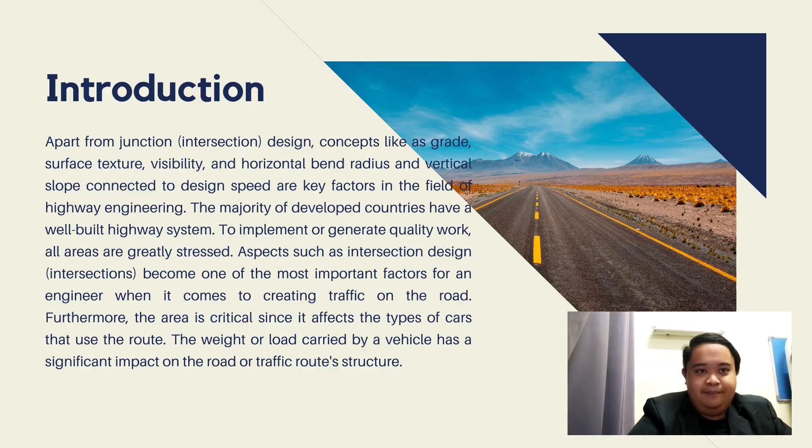Not to mention, non-destructive testing procedures are used in this pavement condition assessment, which is PCA, as detailed in the methodology chapter. The study area of this project is Taman Pelangi Road to Jalan Panchor, which is a distance of 1 km. The objective of this project is divided into 3 objectives. The first one is to be able to survey a 1 km road for the pavement condition index, which is PCI, at Taman Pelangi Road to Jalan Panchor Road. The second one, determine what kind of repair or rehabilitation is needed to improve the road pavement condition index. The last one is to learn about pavement discomfort and develop a better grasp of it.

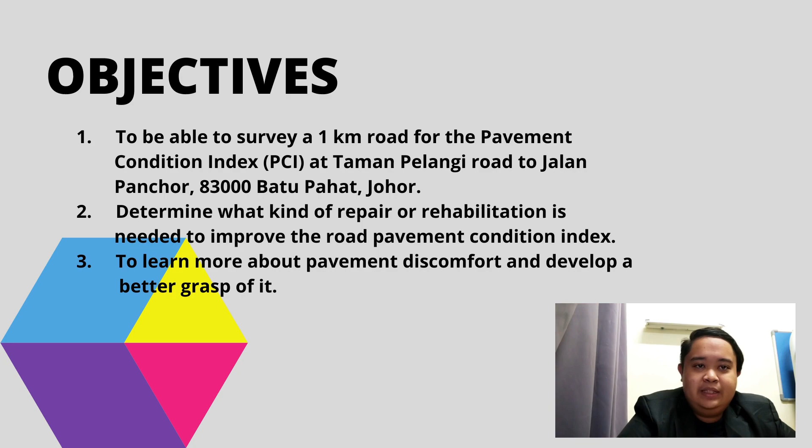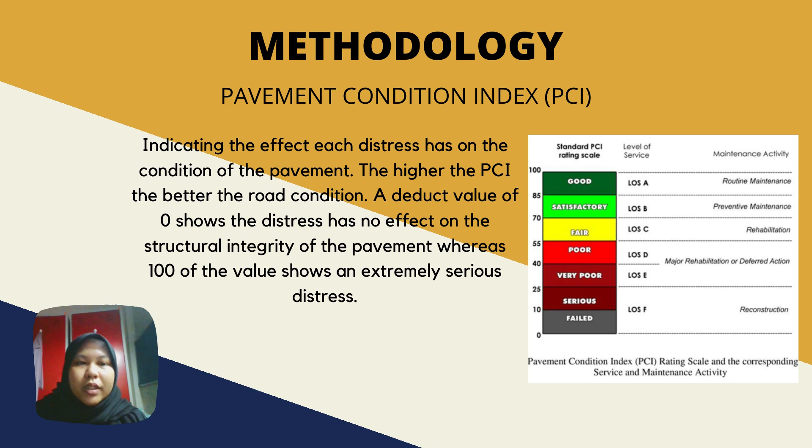AF200065. So for methodology, pavement condition index, PCI, is indicating the effect each distress has on the condition of the pavement. The higher the PCI, the better the road condition. The deduct value of 0 shows the distress has no effect on the structural integrity of the pavement, whereas a value of 100 shows an extremely serious distress.

Before we determine the value of PCI, we have to determine the deduct value first. First, sum up the quantity of each distress type at each severity level and record the data in the condition survey data sheet. Second, the total quantity of each distress type is then divided by the sample area and multiplied by 100 to obtain the percentage of density of each distress type and severity. The last one is determine the deduct value for each distress type and severity level combination based on the distress deduct value curves in the appendix.

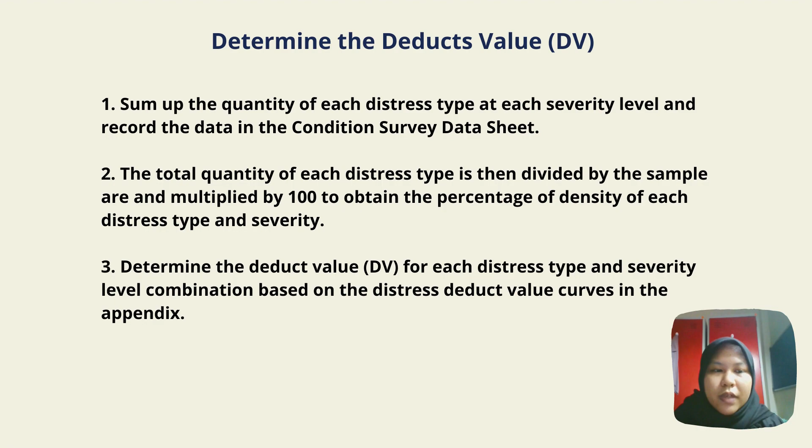Next, determine the maximum allowable number of deducts, which is M. First, if only one individual deduct value is over 2 for paved roads or over 5 for airfields or unpaved roads, the total deduct value is used instead of the corrected deduct value. Otherwise, list the individual deduct values in descending order and determine the maximum allowable number of deducts using the procedure described in the following steps. Next, the allowable number of deducts is obtained by using the formula M = 1 + (9/95)(100 - HDV) for airfield and unsurfaced roads. For surfaced roads, M = 1 + (9/98)(100 - HDV). Lastly, the number of individual deduct values is reduced to the M largest deduct values, including the fractional part.

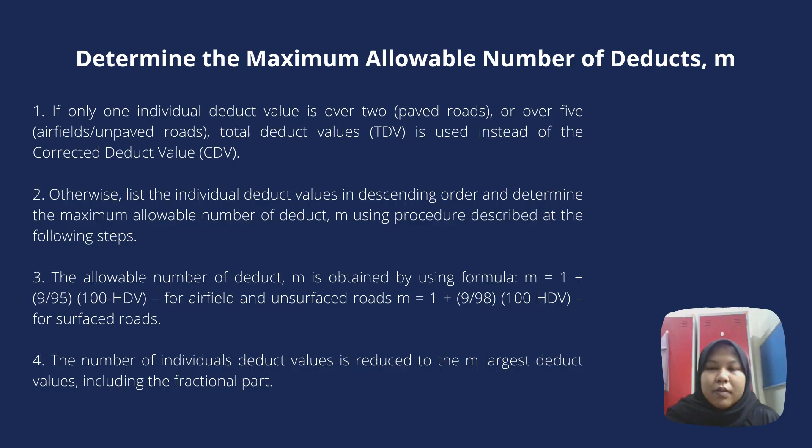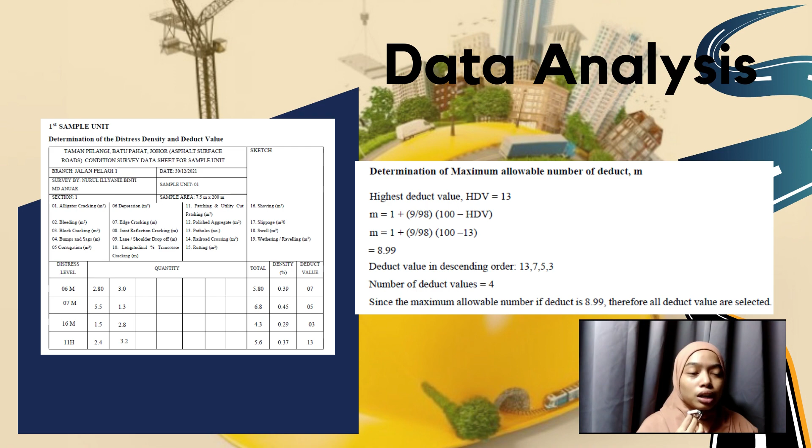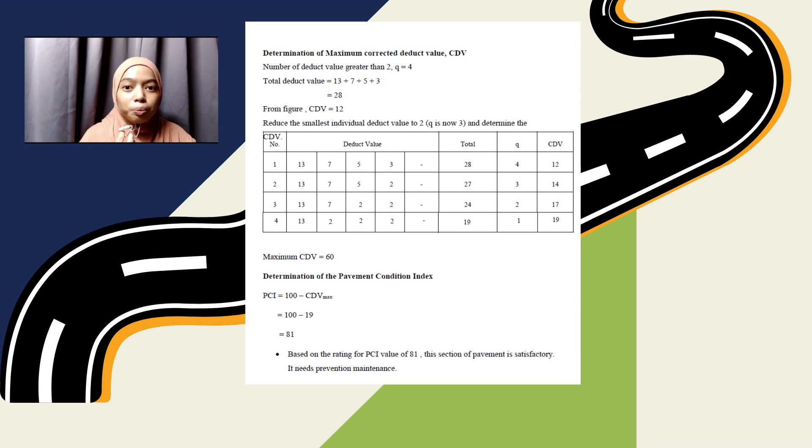For data analysis, here are the examples in collecting the data. First, we need to determine the distress density and the deduct value. Next, we need to determine the maximum allowable number of deducts, where M = 1 + (9/98)(100 - HDV). Next, we need to find the maximum corrected deduct value, CDV, where the number of deducts must be greater than 2, and the value of CDV is obtained from the pavement management graph, and from the CDV value, we could determine the pavement condition index, PCI, where PCI = 100 - CDV.

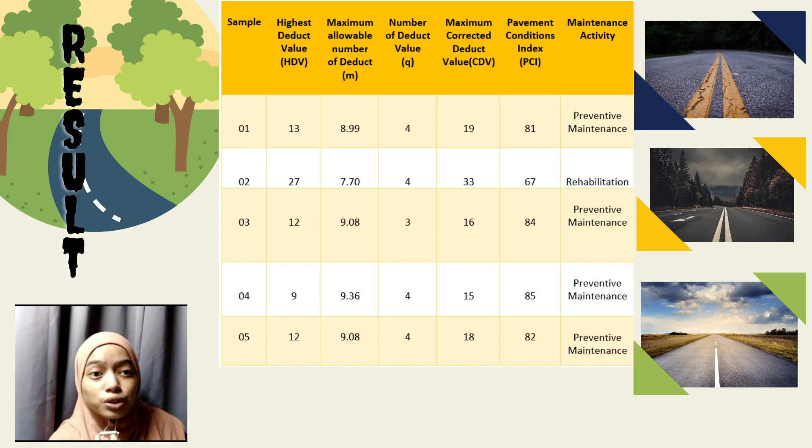Here are the results of data analysis. For maintenance activity, samples 1, 3, 4 and 5 must be preventive maintenance, and sample 2 must be rehabilitation. Next, we move towards the discussion of the result.

Based on the calculation, the total average of the PCI value for our survey road is 80. In the first, third, fourth and fifth road sections, the PCI is in satisfactory condition. The PCI value for the second road section is in fair condition.

Firstly, we found that the most common distress type is patching and utility cut patching. The road's first, second, third and fourth sections all have this form of distress. A patch is an area where the original pavement has been removed and a filler material has been installed in its place. A patch deterioration is often faster than that of the original pavement.

Patching is typically classified as low, medium or high. Only the initial segment of the road had high patching, while the rest had medium patching. At some point during their service life, all flexible pavement will require patching. Surface patching should be done to a quality that is adequate for the available resources, with the goal of preserving a smooth ride for as long as feasible.

Besides, depression is also one of the frequent distresses found. We found it in sections 1, 2, 4 and 5. Depressions are small patches of pavement that are somewhat lower in elevation than the surrounding pavement. Light depressions are sometimes not visible until after a storm, when ponding water produces a birdbath area on dry pavement.

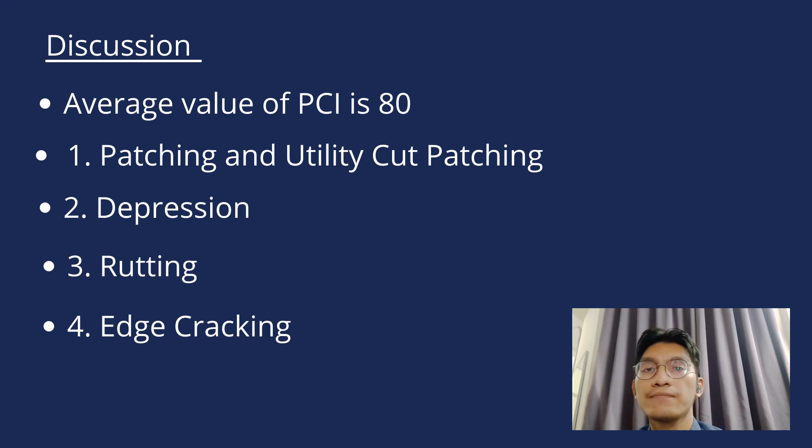So these are the maintenance or rehabilitation methods needed to improve the PCI. The first one is the distress potholes. Potholes and localized failures should be repaired as soon as they are reported. The use of an asphalt tack is best suggested. These are the procedures to repair a pothole permanently.

First, remove the damaged material all the way down to a solid foundation, and then vertically square off the hole's edges, and then try to keep the hole as dry as possible, and then if possible use a tack to coat the hole, and lastly spread the mixture out and make sure to compact it.

The second one is bleeding. The following repairs may remove or reduce road bleeding. First, minor bleeding can often be fixed by applying coarse sand to blot up the excess asphalt binder. Major bleeding can be fixed by cutting off excess asphalt with a motor grader or removing it using a heater planer.

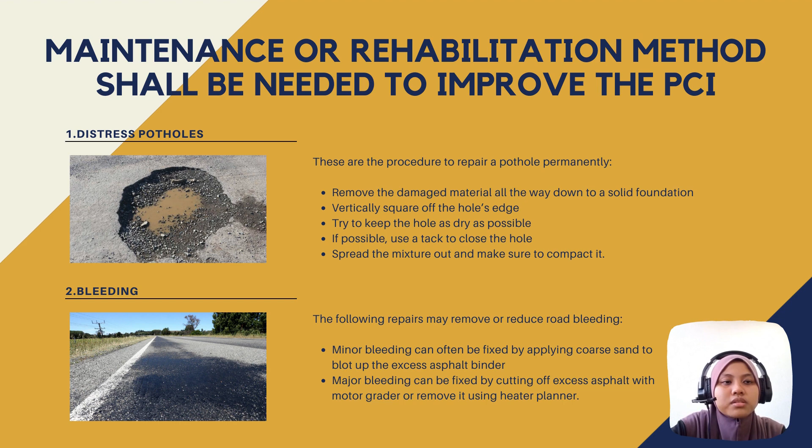After that, the third one is alligator cracking. When alligator cracks occur in asphalt, they must be repaired yearly to avoid further damage. The following repairs may remove alligator cracking. First, repair the subgrade. By repairing the subgrade, the foundation can be ultimately strengthened. After that is crack filling and sealing. It can aid in preventing water from infiltrating the asphalt.

And the last one, replace the entire asphalt pavement surface. As a result, the subbase may be built in such a way that alligator cracking is removed. And the last one is patching. For patching, backfilling a full depth fix with dense graded hot mix asphalt is recommended. If a suitable hot mix is not available, an adequate cold mix can be used.

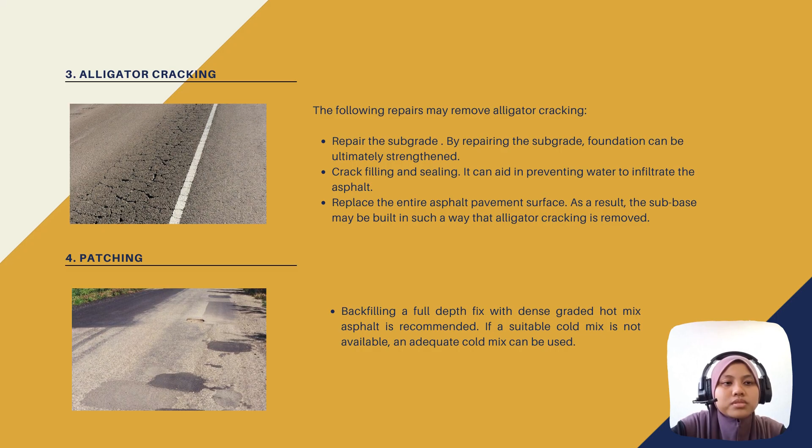In conclusion, there are many road distresses noticed on the road of Jalan Panchor, Batu Pahat, Johor, based on this pavement condition project. Alligator cracking, bleeding, potholes and patching are the road distresses noted. For visual inspection and ranking, an acceptable sample size was chosen along the road.

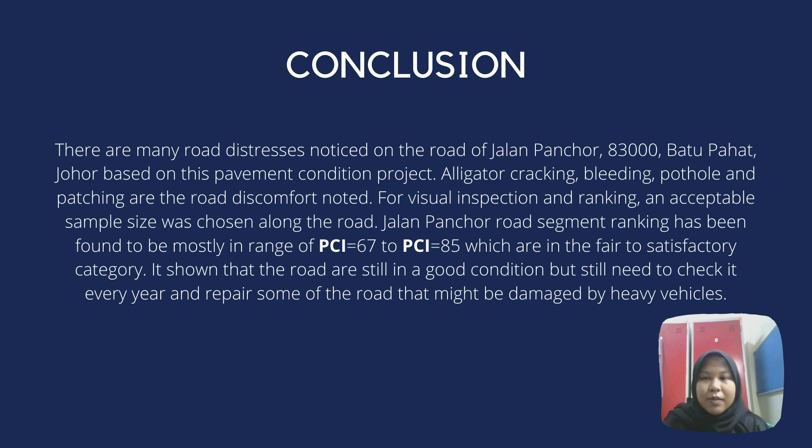The Jalan Panchor road segment ranking has been found to be mostly in the range of PCI 67 to 85, which is in the fair to satisfactory category. It shows that the roads are still in good condition, but they still need to be checked every year and some of the road that might be damaged by heavy vehicles repaired.